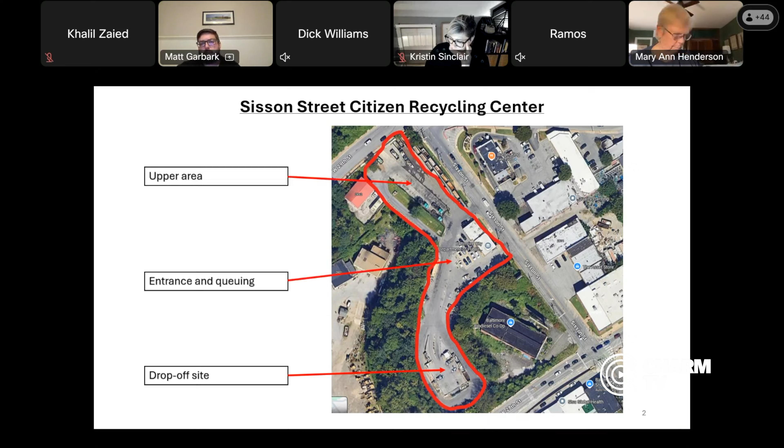So let me see if I can... there we go. All right, so this is the current site, the Sisson Street site. As I mentioned last time, it's an awkward shape. It is about 5.5 acres of property, but it's strangely laid out. There's basically, for lack of better terminology, I'm going to talk about the three different areas of the site. Let's start at the southern side, that's our drop-off site. Then we'll go into the center side, which is the entrance and the queuing area. And then the upper portion of the site is where we have storage and roll-off.

So going into some more detail, this is the drop-off site. As most folks know who've been there, vehicles drive up to a raised concrete platform. It is a rectangle.

You then back your vehicle in, and you can drop off debris, rubbish, whatever, from a higher level right into the dumpster. This is the only type of design we have currently at our facilities, and I think that's one of the reasons so many people prefer this site.

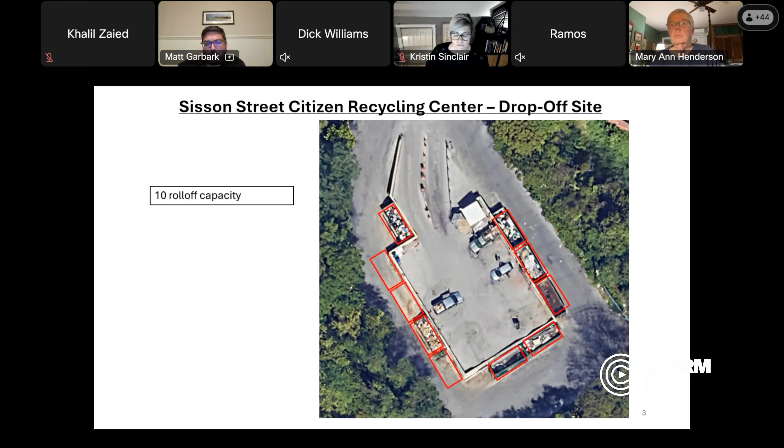This site can accommodate 10 roll-off capacity for dumpsters to be thrown in there. They are outfitted around the site itself, and tractor trailers then come up around the site and can pick up and drop off these roll-offs as needed.

If we are looking at cramming everyone in there, we could get maybe 16 vehicles. That would not be desirable because they would be crammed, so we don't ever have that many, but that would be the maximum capacity. Again, the way you go in is you drive straight in and then back into the bays, and you're able to throw your refuse down from higher up.

Looking at that center area now, this is our facility, our building. We have our bathrooms, some office space, as well as locker room space. There are 27 total workers at the Sisson Street facility.

We have a chief, a superintendent, 5 office staff, 8 CDL drivers, and then 12 attendants around the yard. This also has some area for parking for the folks. It's very limited, but it's in this area as well.

This is the access way to get to the drop-off site. Here is also where we have our hazardous materials, composting, recycling, and some of the other drop-off areas before you get to the refuse drop-off site itself.

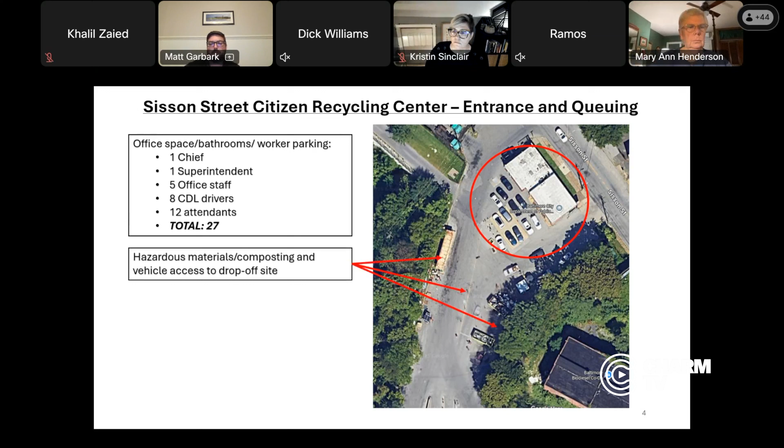Now looking at the top of the facility, this is an area where we store our roll-off dumpsters as well as the trucks that carry those dumpsters around. We have space for 15 roll-off dumpsters. We could get more in there, but that makes it very difficult to maneuver around.

We are looking for and would like to have space for 10 roll-off trucks in this area, and they're just parked in parallel and can be deployed as needed. So that's a quick overview of the Sisson Street facility.

As I mentioned, the current conditions: there's 27 workers, it's about 5.5 acres, it holds 15 roll-offs. It can hold more, but that's the desirable amount. 10 roll-off trucks, and weekly tonnage fluctuates from under 10 tons in the winter to nearly 20 tons in the summer. Those are weekly averages, averaging about 15.5 tons if you're looking at calendar year from this past January.

At this point, we have no renovation plans, and really have not developed detailed costs on this facility. We were not looking to make a lot of investments here. We have done a lot of smaller scale piecemeal things. We've gotten a modular trailer to be used as a locker room facility.

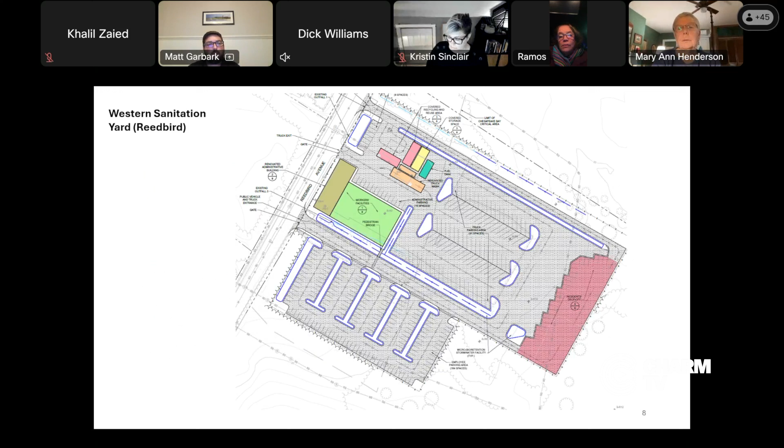Director, can I hold you right there? I wanted to check with task force members if you had questions about Sisson Street directly, given what the director has discussed.

Could we get a bit more information on exactly what that $1.5 million light renovation would entail, and would that fully implement the changes that would be necessary for safety for the workers on that site?

Deputy Director Robinson, do you have that information? Excuse me, I apologize, I'm a little under the weather, so please excuse my voice.

Essentially, what that would allow us to do for the lower amount, the 1.5 to 2 million, would allow us to raze the building that is currently there, because that is not in good standing at all. We would not be able to do any renovations on it, we would actually have to tear it down and rebuild. What this allows us to do is tear that down, level the ground, and then put actual modular trailers there.

These modular trailers would be sufficient for short-term usage, maybe 3 to 5 years. This would house the administrative offices for the team working there, in addition to the restroom and locker room already established. It does not address the layout for queuing or any of the other areas we'll be looking at updating for this property.

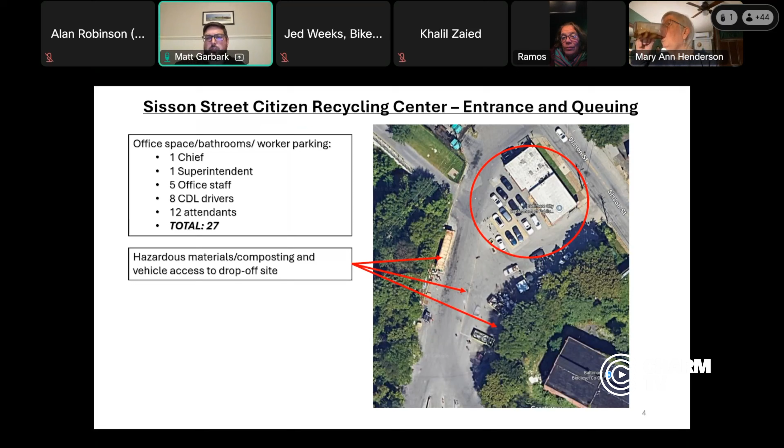You can see here, this is the only space for an administrative building. As Deputy Director Robinson mentioned, we would have to knock this down to be able to put a trailer at that site. The rest of it narrows down to a very narrow drive area as you go in, and there's just not enough room. The current trailer we are building is up here, it's going to be to your lower right. We're putting it, it's actually there now, it's a new locker room for our workers. So it's actually constrained some of our roll-off space even more than it currently did.

Okay, so even let's put aside the 1.5 million for a second. Even if you had, I forget what the upper figure was for a total replacement, but let's say if you re-envisioned the entire site, you'd still not be able to fit everything you desire and need there.

We would be able to do what we're doing there, and we're doing it well. We would obviously desire those additional factors like having the truck wash, additional vehicles, other things. We would not be able to do all of that. We would be able to improve the site and make it better for our workers and keep the same level of service. Thank you.

Yes, I had some. Go ahead. I was curious, with the 1.5 million, are you able to separate the costs of the additional trailers from the demolition cost itself? I asked because some of the sites we're looking at have buildings on them and they would need to be demolished anyway, so it's just helpful to be able to compare that.

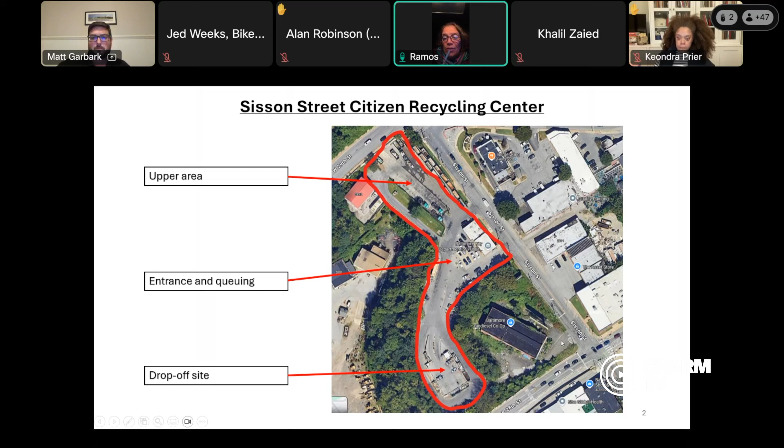I appreciate that. So Director, if you can go back to your slide around Less Waste, Better Baltimore. Just for members, the link to the entire plan is on the web, just Google it.

It would be tough. I'm not going to say there's no room, but it would be extremely tough to add things at a scale that we would want. We could do small drop-offs of this, that, or the other thing, a day here, a day there, but doing some of these additional disposal and collection things, we would not be able to do it at a scale that would really make an impact with the current site.

And just to remind folks, there is a push now to close the incinerator, and we're also running out of room in the landfill. So there is going to have to be, at some point, work done on the sites to collect more items that can stay out of the landfill or incinerator, and also be reused. I know we're going to have a hearing in the Public Health Committee shortly about that, and where we are. So when we're thinking about an ideal site, we're not only thinking about trash and recycling, but also other ways to get things out of the landfill and incinerator. We would have to factor that into the planning.

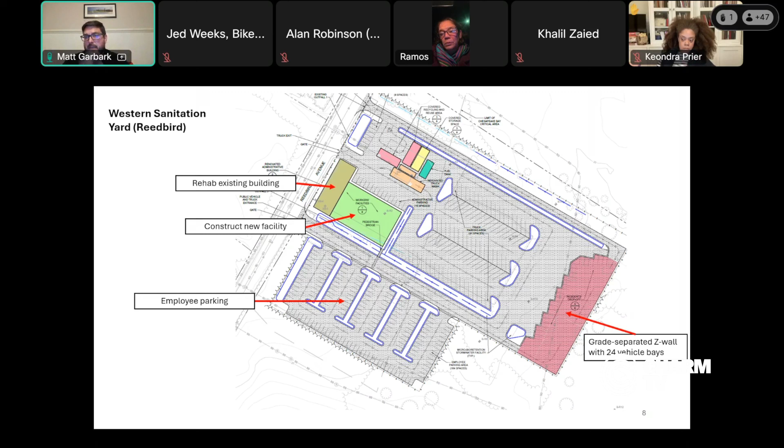This would allow our tractor trailers and roll-offs to actually be at a lower grade, never in with the other vehicles. The vehicles would be on the perimeter of the facility, and our roll-offs would be in the interior, able to get in and move it out very quickly.

This would be the center area for our load packers. We have about 70 to 80 load packers for each site. Then this would be a covered recycling and reuse area. It's important that this be a covered facility so the recycling materials aren't contaminated in rain or inclement weather. This is a truck wash station here.

The entire cost of this is $19 to $20 million. This is underway and programmed in our CIP. Obviously this price has increased, and we expect it to be around this, could increase a bit more, but this is the type of facility we're really desiring, and this is what our west side facility will look like.

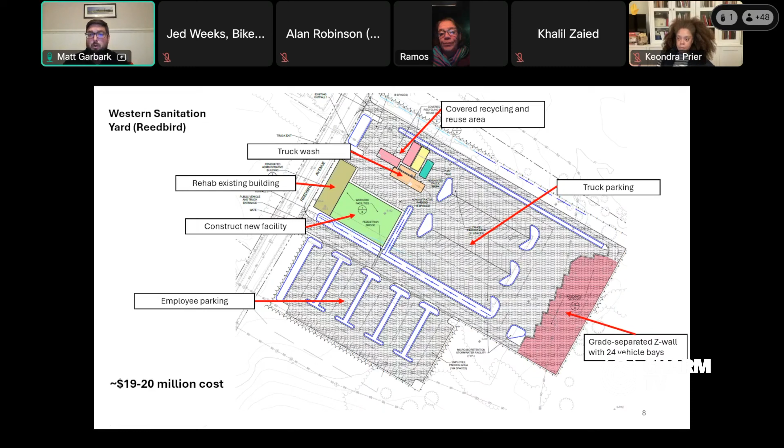Our east side facility at Bowley's Lane is going to be even more, a much larger area. That is an old closed landfill. It's a much larger site, and we are doing a lot more construction there.

First, this is the building we are going to rehab, an existing office building. The bones of it are fine; the interior just needs to be gutted and the systems restored. We are going to be building a new administration building with new facilities, new locker rooms, everything in there.

This is the truck parking for our load packers, again 70 to 80 load packers for the east and west each. This would be for employee parking and other visitor parking. This is, again, a grade-separated Z-wall, similar to Reedbird, also with 24 bays.

Again, tractor trailers would go down to the lower area, the vehicles would be at the upper area—or vice versa, I'm sorry, the vehicles would be at the bottom side, tractor trailers would be at the top, and would be able to move the roll-offs around.

The other thing this facility would have is a small hauler drop-off. Right now, all small haulers in the city—these are commercial haulers, small haulers, not massive construction, but small haulers—there's a permit program for that, and they all have to go to the Northwest Transfer Station. It completely congests the Northwest Transfer Station and makes it very difficult.

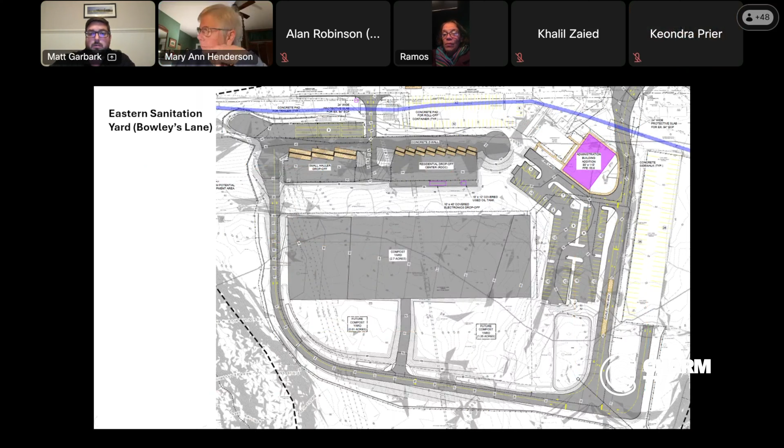That is it. Yeah, I just have one quick question. I may have missed it. What was the investment in the Western Sanitation on Reedbird? Did you say what was going on there in terms of capital expenditures? Yeah, okay, about $19 to $20 million.

19 to 20, okay. And that is right now, current cost, not including any tariffs. Right, okay, thank you.

Director, just maybe for the public, it would be helpful if you could say how many bays that are elevated exist at these current sites now. There are 0. At these sites right now, before we close Reedbird and currently at Bowley's, we have roll-offs that are on the ground. Vehicles drive in, we have attendants who help people load them into the containers. It is very inefficient, it is actually dangerous. People can sometimes fall, other times people have to heave stuff over the side to get it in the containers.

It is something that we don't like, our crews don't like it. It's very dangerous, and these new facilities are going to make it a lot better, a lot more efficient, and a lot safer for everyone to use.

Thanks. I guess, correct me if I'm wrong, but I don't believe Northwest has the elevated ones either. I haven't been up there since the investment. I don't believe they do.

However, for our transfer station, we actually tip, because there's a couple things that happen. There's the small haulers, there's the drop-off center, and then there's actually a transfer area for city trucks. We go in there and it's a tipping floor. All of our recycling is tipped in the transfer station, and then we have front-end loaders that push it into compactors, which compact it, then put it on a tractor trailer, and it's taken to our recycling processing facility. But in terms of the residential drop-off, no, it's dumpsters.

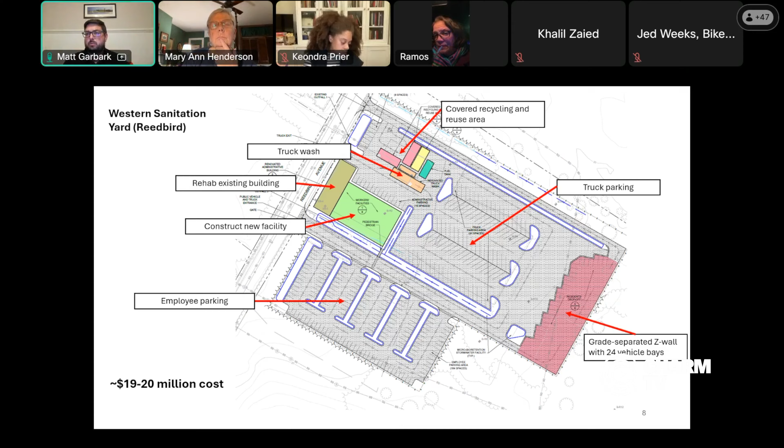The problem is there will be a transition period for people who are using Sisson to then transition to these new facilities. How long that will be, I don't know. There is a very real concern that there could be illegal dumping during that period, and other issues. But the big picture is to have our yards and other facilities focused there, with drop-off centers as well, to handle all of this. That is the long-term picture. But how we transition to that, and how long that transition will last, is part of the question.

So how long are these facilities undergoing renovation? I thought it was like a 5-year time horizon. Is that right? Yes.

Reedbird is on the faster scale. We're about 60% design, expecting 90 to close to 100% design this spring, and then we'd be looking at an 18-month to 2-year construction period. That's assuming everything goes perfectly. There are still a lot of questions in terms of some design elements, permitting, and other things.

Bowley's Lane is going to be a little longer. We're probably looking at the earliest 5 to 6 years with that, because there's still a bit of a funding gap we have to work on for Bowley's Lane.

I guess the other thing is that, as you mentioned, Sisson is so popular for a couple of reasons. One is it's very easy to find, it's centrally located, but also just the design of the grade, which it sounds like you're trying to replicate in these other sites. But the convenience is definitely something I think residents think about.

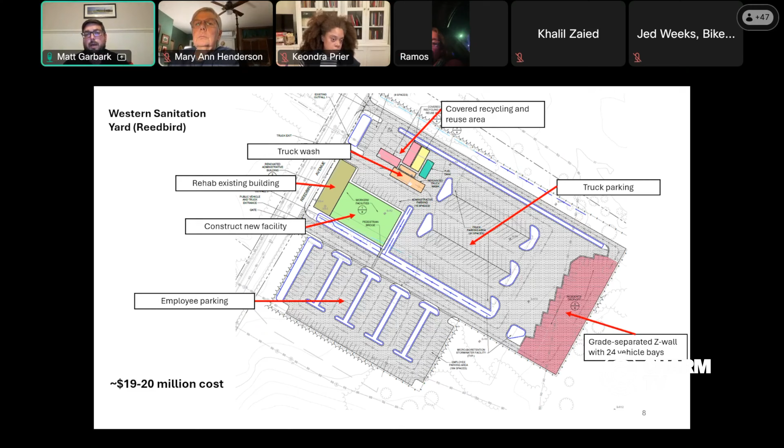If you look at the bottom area with those purple rectangles that are hollow, that would be where there would be drop-off centers, recycling drop-off areas. So you would drive in, back into the bay, and on the other side you could drop off your recycling material. And then obviously we have the compost facility.

Is Bowley's also going to be a transfer station for our sanitation workers as well? Maybe you said this already and I'm sorry if I missed it.

At this point, we don't think so. We were originally thinking that would be the case, but that cost would be over $70 million. We did some test samples, went down close to 100 feet, and we were still finding refuse. So to build a tipping floor and compaction equipment to provide that pressure, we'd have to pile drive below this all the way into the bedrock, which could be upwards of 100 feet, raising the cost to over $70 million.

What we thought is that the biggest issue, if we could get some pressure off the Northwest transfer facility on the small hauler side, we could free up some pressure over there for our vehicles, and then look at the Quarantine Road landfill to make things a little more efficient down there.

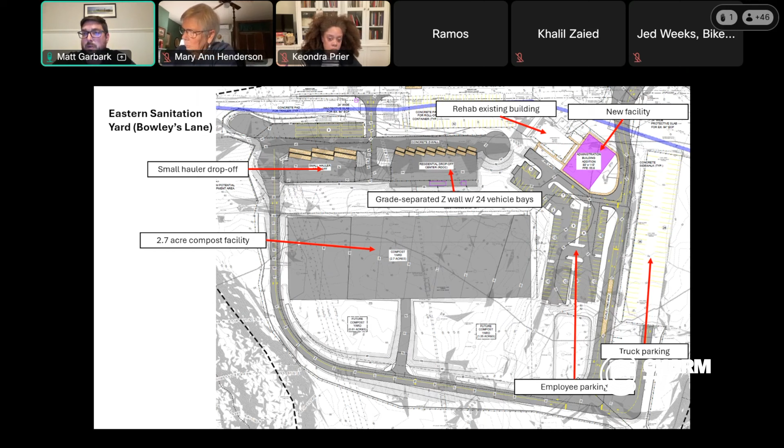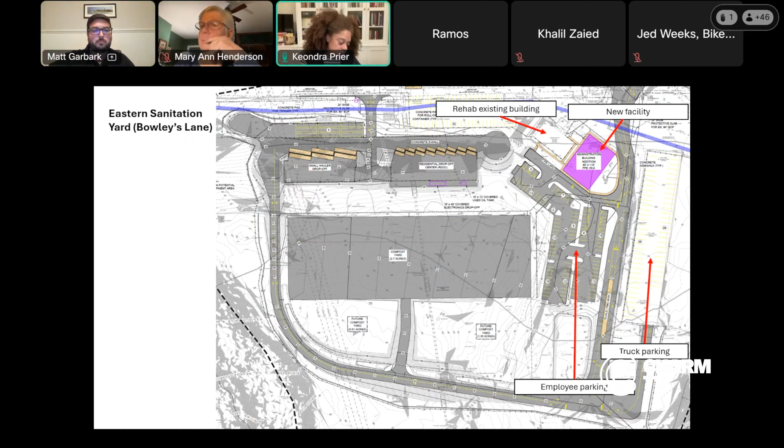Can I ask a question? Of course. Okay, I think I got a little mixed up when you mentioned the different improvements. I just want to make sure I have the right information. So, you're currently investing 19 to 20 million at Western Sanitation Yard with the hopes that construction will be complete in about 3 years.

Yes. And then the Eastern Sanitation Yard, there's an investment slated between 30 and 50 million. It was 33, sorry, that's where we stand now. We were only at 30% design. So this is all conceptual. We still need to do a lot of geotechnical analysis and other things that could raise the cost, but this is where we stand now. But it is not the 70 that we were originally anticipating.

Oh, okay, and then are there future plans for investment at Northwest and Quarantine Road? Quarantine Road, yes. Right now we are looking at 50 to 70 million dollars to expand the landfill into a new cell. The question that I have, the question that a lot of us have, is that worth it for just 10 to 15 years more life cycle? Or is there something different that we can do with that facility in terms of better transfer operations, better reuse, better other items, ideas that we have there?

We're currently engaging in a study to see what different disposal options are available to us. We have a tremendous amount of land down at Quarantine, a lot of opportunity there. And I think this is an interesting time with all these other investments to really rethink how we look at our disposal operations and get out of the incineration and the landfilling if we can.

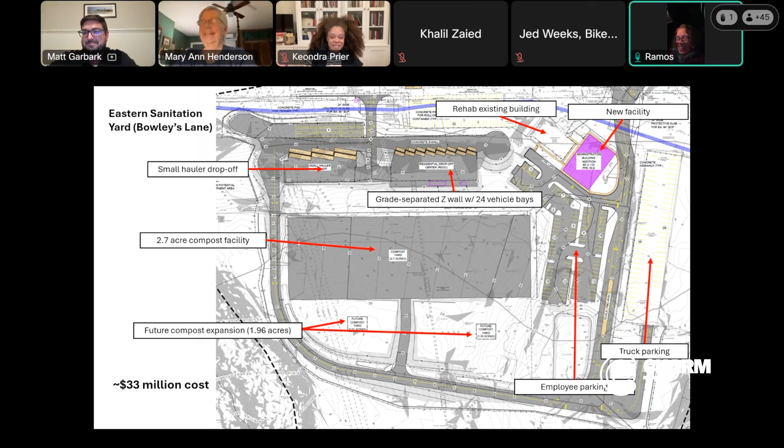Okay. Wow, I'd really like to know where Johns Hopkins University takes its trash. I think a lot of us would like to know. Sorry. Yeah, no, I've got my own little battle there.

Any other questions? They could come to us—there's nothing saying they can't. They would pay the tipping fee, but there are a lot of other private entities that take their waste elsewhere and use Waste Management or other places to haul things away and take them elsewhere. That's super interesting, I guess I never put two and two together.

Wow, okay. Any other questions for the director from task force members? And I apologize, I had my phone, I'm in the car, so of course I'm nice and warm, but that doesn't do very well with the phone.

So okay, Director, this was really helpful. I really appreciate the opportunity to have these discussions, and I'm sure members are going to have further questions as we reflect on the presentation. If members do have those questions, so that everybody benefits from the answers, please go ahead and put them in on the email with everybody, because then we can all benefit from the answers. But this does give us, I think, a grounding of what the needs are for the department.

Madam Chair, yeah, it looks like Councilman Torrance had a question. I'm so sorry, go ahead Councilman. In the chat? In the chat. I think he asked about whether an analysis has been done about the impact of shifting from Sisson.

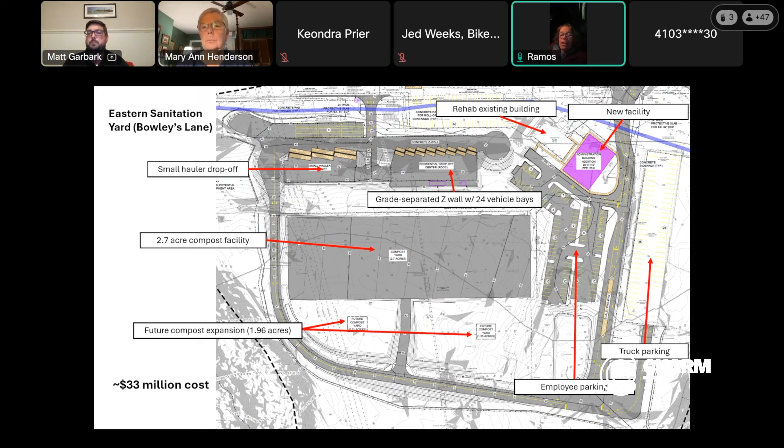But I think the councilman's question is slightly different than that—if I read it properly, the question is, does not having a facility more centrally located cost us in other ways, like air pollution, because people are driving further? I don't know that anybody's done that analysis. At some point you're getting into very specific factors and details with people waiting in queuing lines and other things. It's something I'm certain we could look into and start addressing.

I'd like to add one more thing, if possible. For the size of our city, its population, and geographically in terms of land, the number of locations we have is more than what other places do. That's right, it's true.

Just to give you a perspective on that, that may be true. I mean, I still think we need to consider the convenience factor relative to getting to all these places.

And the other factor with this is the benefits districts use Sisson Street. Going elsewhere throughout the city would likely increase costs for the benefits districts. I thought it was only Midtown and Charles Village, but all of the benefits districts do use Sisson Street. I thought downtown did as well. I'd have to verify that. I know Midtown and Charles, and Midtown and Waterfront. Yeah, Midtown does.

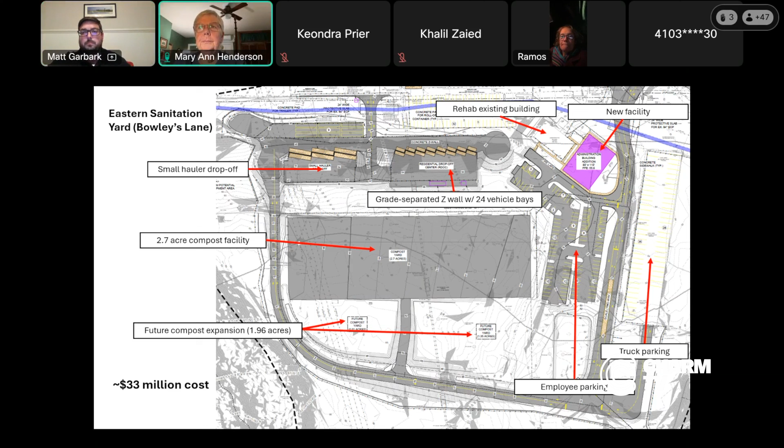I think that's an important thing to figure out, whether all the benefits districts use that or not, because some of them might have compactor loader type trucks and take them to the incinerator. We can get that information quickly. But I do know for a fact that Charles Village Community Benefits District does in fact use Sisson Street, and there would be a significant increase in staff time to drive out to any of the other locations.

I had a quick question because I wasn't sure if we were trying to shift past this, or if you're going to go through the rest of the slides that are here. The rest of the slides are just the facilities we talked about last time. I didn't know if you wanted to go into them anymore, or if there's nothing new to present. If you don't mind taking a second to go through them again quickly, that'll lead into my slides that will have some alternatives other folks have talked about.

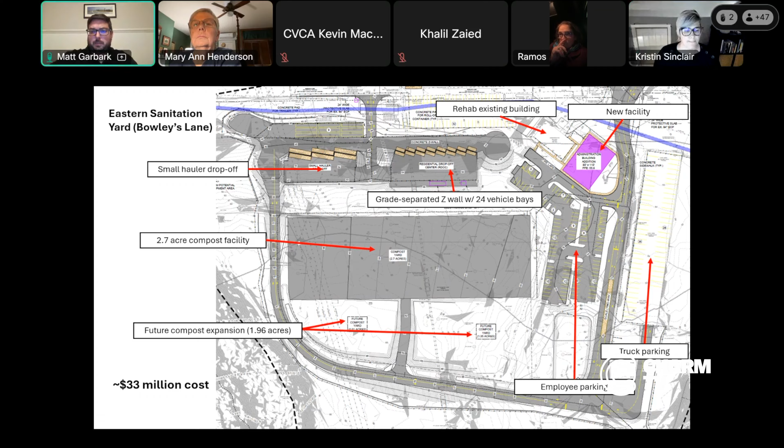I have one thing to add to the Falls Road location that I want to make sure is on the concerns list that everybody has there, from the council. Thank you. So the sites we talked about, I mentioned last time that we've looked at, and again this is not an exhaustive list.

There were literally dozens of sites. Some were just spitball ideas that we said no, that doesn't work, this doesn't work. These are sort of the six sites where there's been some analysis. And I'm not saying good, bad, or different, I'm saying is it feasible, is it possible to locate the facilities there?

So the first location is another closed landfill. It would be at Monument and Edison Highway, in East Baltimore. It is a city-owned site, so we wouldn't have to buy it or lease it. It is a very large site, 28 acres. However, it is quite far away from the current Sisson Street location, so I don't think it would be convenient for people who use Sisson to then go out to this location. It is also located on a closed landfill, and as we're seeing with Bowleys, building anything on a closed landfill is very expensive because you don't know what's underneath. That has raised the price probably 50, 60, and even higher percent to actually build on those sites. So that is another downside with the closed landfill at Monument and Edison.

We looked at 400 West North Avenue. This is a parcel of property behind a light rail facility off of North Avenue. It is centrally located, this would be a great use of existing industrial space, and it is a fairly large area, 8 acres. It's kind of awkward. Some of the concerns are that it is private property, so there would need to be some sort of acquisition of it, whether it's a lease or a purchase. MTA has raised security issues. There was a question last time about the number of trains that go into this facility.

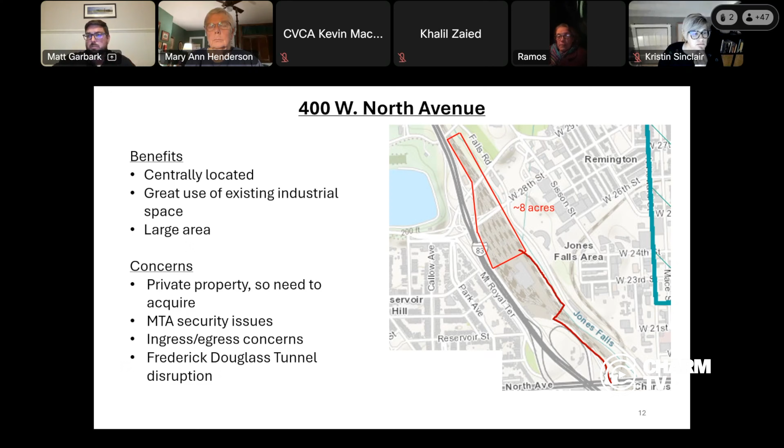We also looked at 560 West North Avenue. This is where the Salt Dome is, and this is the area directly above the Salt Dome. So again, it's centrally located. It is city owned, we wouldn't have to buy it. The problem is it's smaller, so we would not be able to have all of the other stuff that we have at Sisson now. We would only be able to do a drop-off center, so there'd be no storage. We really wouldn't be able to build a large facility or store anything there.

There would be extensive excavation that would have to happen. This area, if you know the area, is extremely, it's very hilly. So there'd have to be a lot of retaining walls and excavation and other things to shore up this facility to be able to handle all of this traffic.

City DOT raised concerns about the amount of excavation that could actually impede their vehicles in how they circle the salt dome to get the salt. There was also ingress egress concerns from the public going into this facility. Also, it would all be the same location, DOT would go in and out the same way, and there were concerns about just capacity and congestion. And the biggest thing that really nixed all of this is the Frederick Douglass Tunnel - there's actually going to be a ventilation shaft right in the middle of that red circle. So that basically nixed the whole idea.

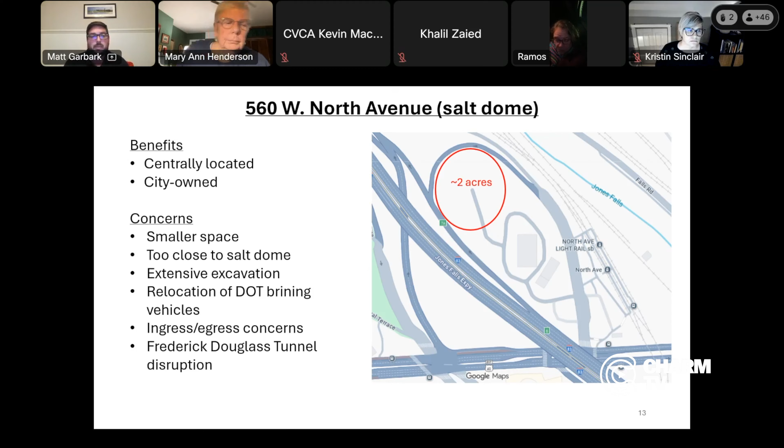And then we looked at Howard and 25th Street. This is a large area, about 4.5 acres. One of the benefits of this is it's a large parcel, it's not a sort of awkward shaped, elongated parcel - it's a large sort of bulbous parcel, so there's a lot of space inside. It is centrally located, it has an updated building. The building is very nice.

It's updated. The challenges, the concerns are that MTA is currently leasing this for a bus transfer yard. It is adjacent to a residential area, and we had some discussions with community members - there was some opposition to this from the community because of its proximity to residential areas.

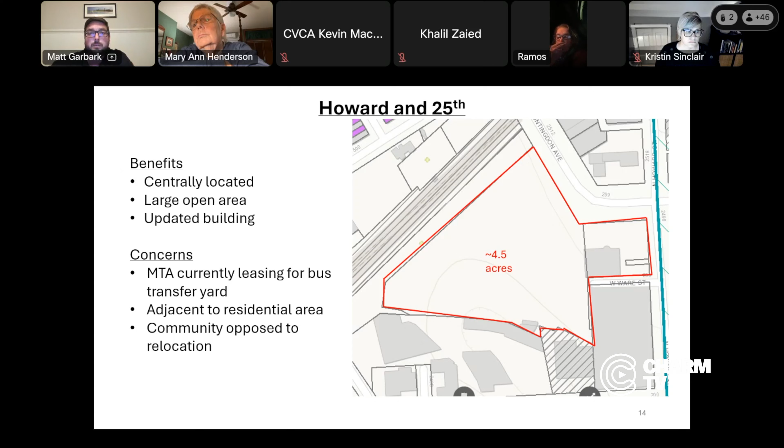Those are all the sites I went over very briefly. Happy to answer any additional questions, but this is just a quick refresh of everything we talked about.

I just wanted to jump in here really quick and make sure that we add here that the community also opposes this as well, as one of the concerns, and make sure that that is on this as well. I will make sure that's on there. We had mentioned the concerns mostly, because there's been a lot of them.

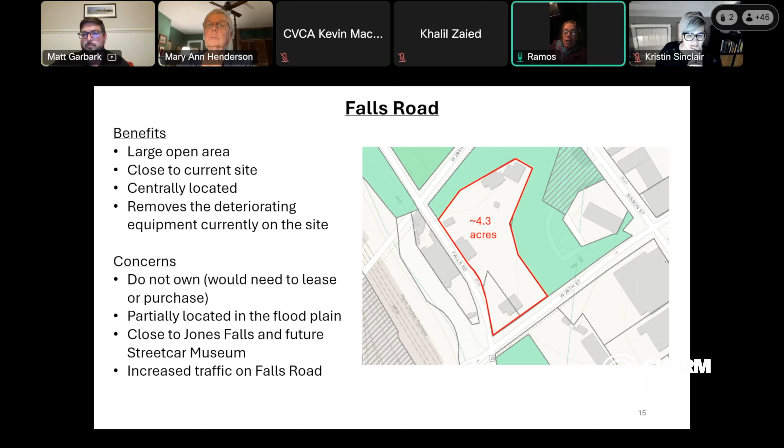Thank you, Director, I really appreciate it. Appreciate your time on this. If I can get my slides to show, Director, if you don't mind taking them off, great. I'm going to try. If somebody could let me present, that would be super.